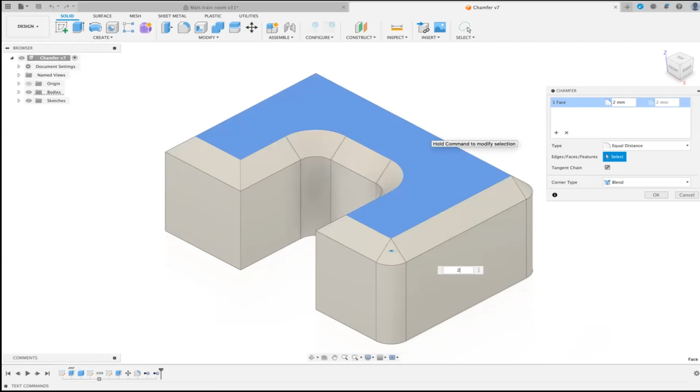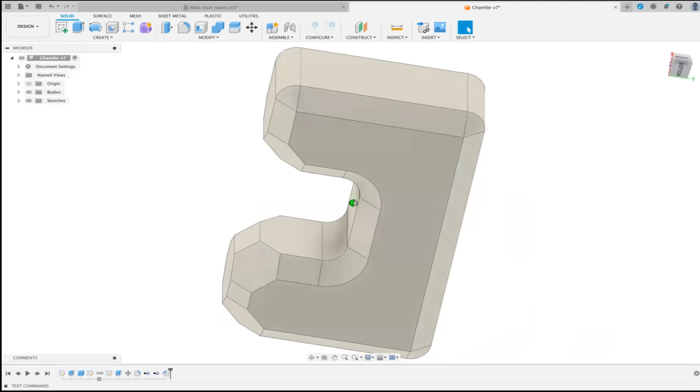If we stop that, you can also select a face. If we select a face and do 2 millimeters, it will go all the way around that face, every edge that touches it. You also have another option called features, which are things like extrudes or boxes. If we select that and do 2 millimeters, it will now do the entire box, or the entire shape, as a chamfer.

Let's just edit that feature. We can always edit chamfers the same as we edit fillets, so we can either add more edges or delete them. If we do an edge, let's do that one, and then set that to 2 millimeters.

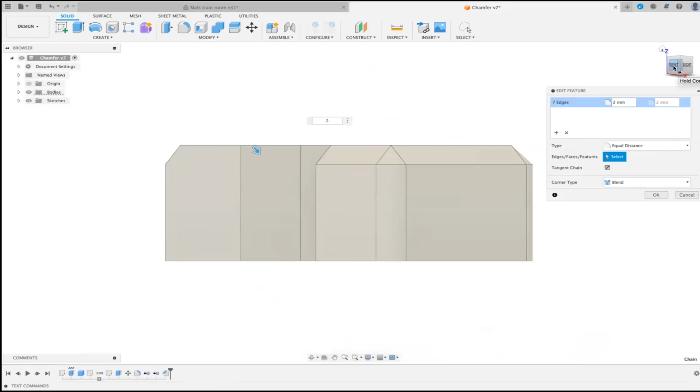Let's have a look at the front there. You'll notice the first real option we've got is equal distance, which means it's equally chamfered between that point and that point. But we also have an option for 2 distances, which is why, if you've noticed, there are 2 boxes up there. Sometimes the second box will grey out because there's only one option available.

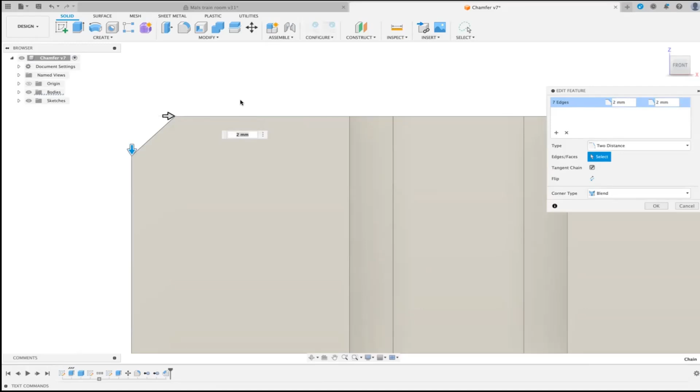You'll notice the blue arrow is highlighted. If I hit the tab key, it will highlight the other one. So I can keep the top one at 2 millimeters, and then do the bottom one at, say, 1 millimeter, which creates a chamfer of unequal distance. You can keep going up to maybe not quite 22, might be a bit too much. Let's try 12 - yeah, so you can actually create almost like a draft.

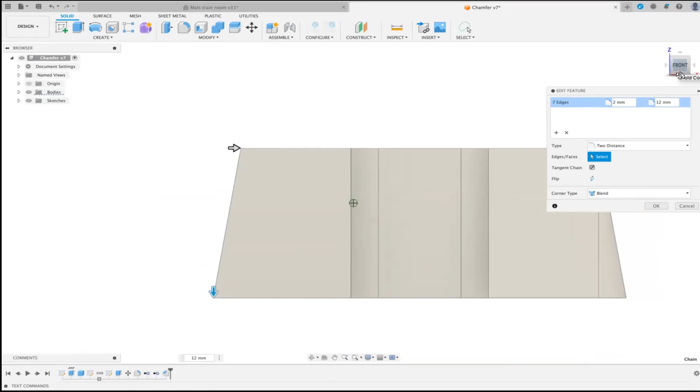You see there that's created almost like a draft. So chamfer is quite a flexible tool. That's the 2 distances option.

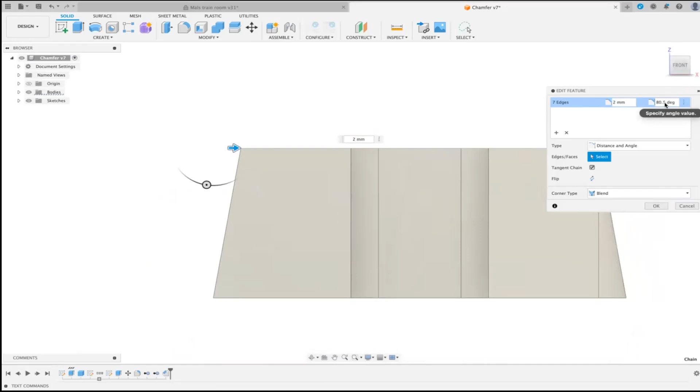You also have a thing called distance and angle. At the moment it's come in 2 millimeters that way, and the angle is 80.5 degrees. You can use the manipulator to take that to 45 degrees, or 30 degrees, whatever you want. That's distance and angle.

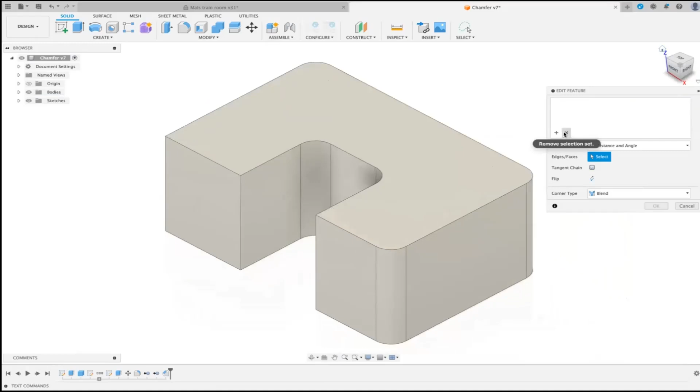The other thing to notice is if I deselect that, deselect that, and then select that line again, we've got the same as before. Let's go back to equal distance. Now instead of it going all the way around - remember with the tangent chain, if that's on - let me cancel that and put tangent chain back on. If we select it and do 2 millimeters, that will do everything that's tangentially connected to that line.

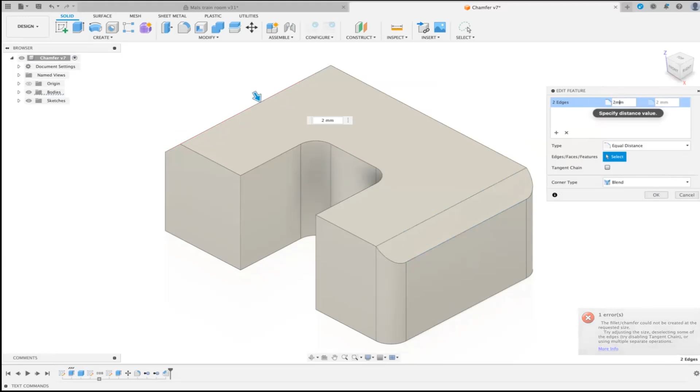But if we take the tangent chain off, it would allow us to select maybe that line, and that line, and do 2 millimeters on just those. That will chamfer just both of those edges.

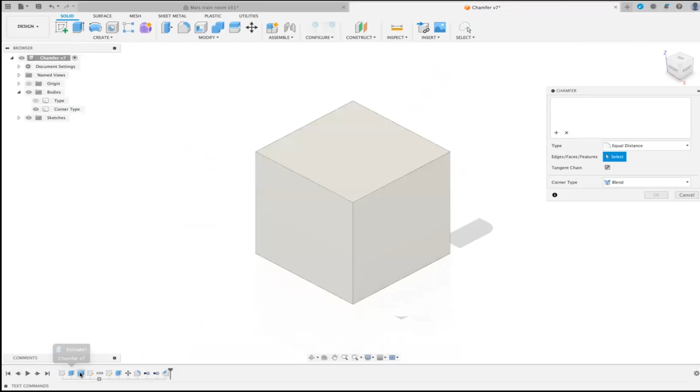If we take that one off, and do again modify chamfer - remember we can select a feature, and at some stage there'll be talk about creating boxes, spheres and things like that. So I can select the feature down there, which was the create-a-box, and make that 2 millimeters.

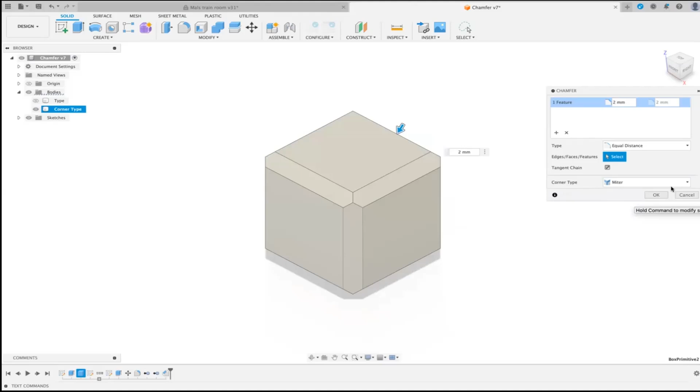The final thing I'd like to talk about is the corner type. The first one you get is chamfer, and obviously that's what it looks like. You then get mitre - that's as if you literally ran a milling bit that way and then up, and it would just end up as a mitre. The final one, which is quite interesting, is blend, especially on a box, because that kind of blends it and makes it a bit of a funky box. Other than that, chamfer.